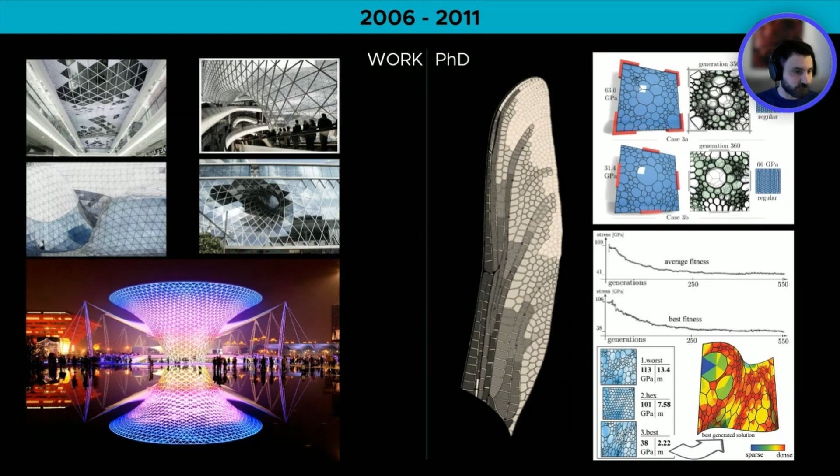And in parallel with this programming that is happening for my PhD, I'm working for Knippers Helbig structural engineering office in Stuttgart on this kind of projects that you see on the picture. So it's free-form grid structures where you have to do a lot of programming because every single element there is unique. There are lots of production problems, static optimization problems, and that's how I got first into Rhino scripting and then later into more complex programming.

So one of the first projects while I was still working in the Knippers Helbig office where the programming was heavily needed was this airport that we did with Fuksas. We won the competition with him then. This is pre-Grasshopper, 2007. This is still Rhino script. And I basically wrote a script that generated this entire facade and the structure in between automatically.

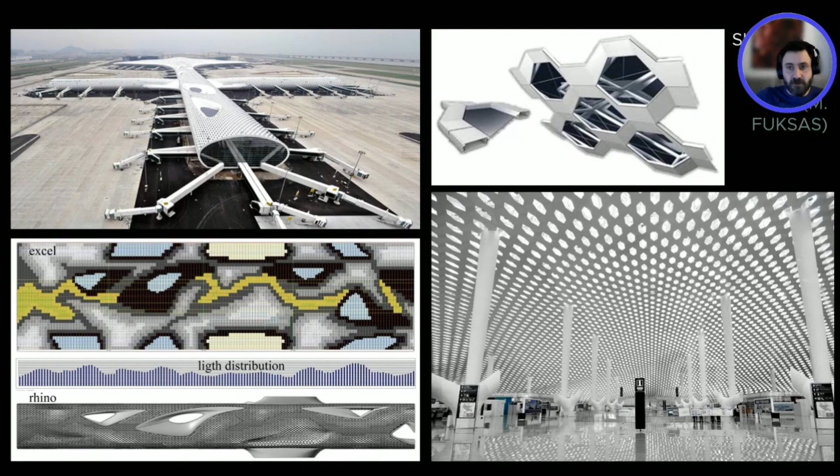What you see here is not a rendering. These are real pictures from the real airport. Some of you might have been there. And because I basically single-handedly programmed this, and every week we got new surfaces from Fuksas, and every week we had to regenerate everything, I was convinced in the power of programming, the power of automation. I thought if a single person can handle the largest freeform structure in the world, regenerating facade, regenerating structure, this has to be the future.

So this made me start my own company in 2011, right after I finished my PhD. And I decided, okay, I'm going to try to bring automation into these three areas, these three phases of the project, if you want. It's design, engineering, and fabrication, eventually assembly. And the goal was from the beginning to try to automate each one of these separate phases, but then introduce the integration, because that is kind of what we all are striving for, right? We all talk about how our industry is siloed, everybody is creating their own models, and then the communication between the models does not work, and so on. Well, if you use automation from the very beginning, then you can actually do that.

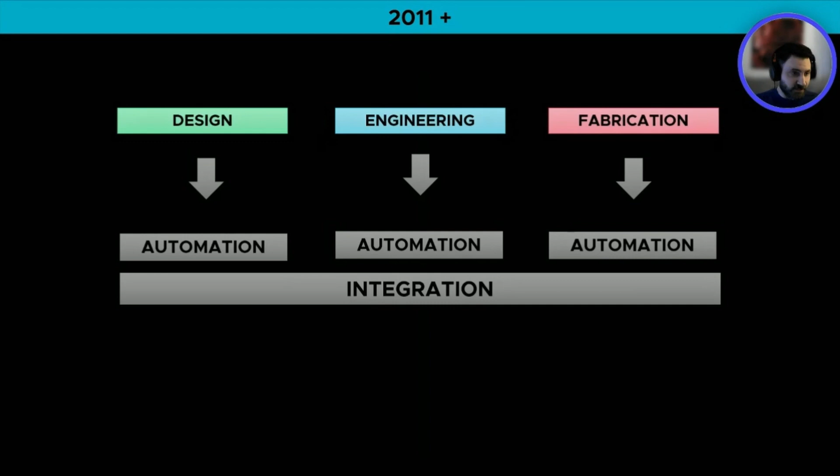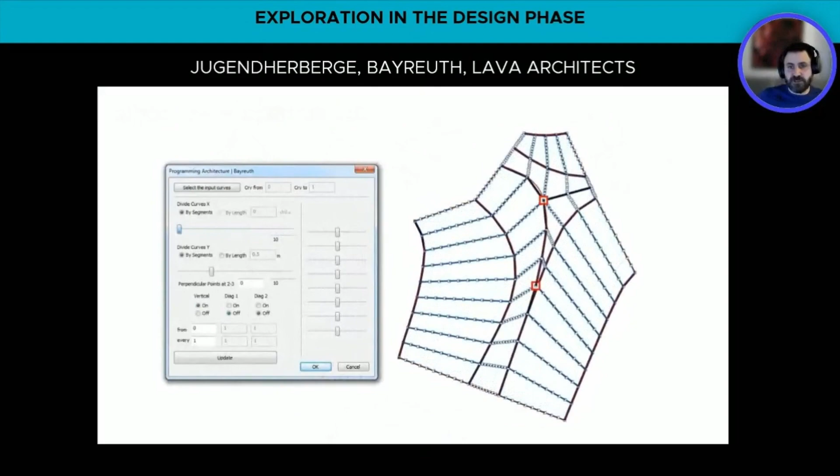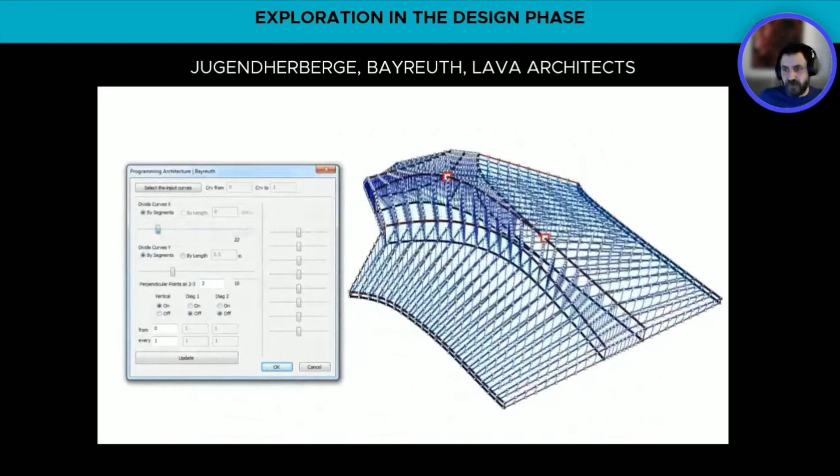From very early days, I tried to enter the design phase, and this shows one of the very early projects where I created a small plugin for Rhino, where we used the sliders to try out different structural solutions very fast. And what you don't see here is that all of these solutions that are tried out were then exported to a static analysis program at the click of a button, so that we could test and try different solutions.

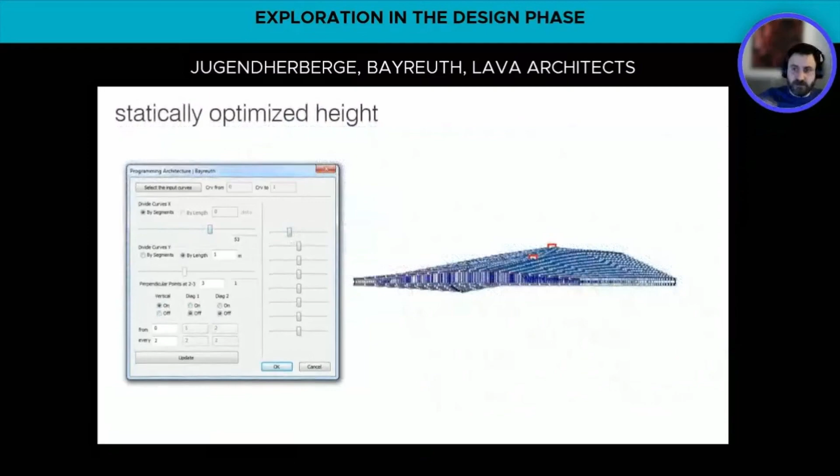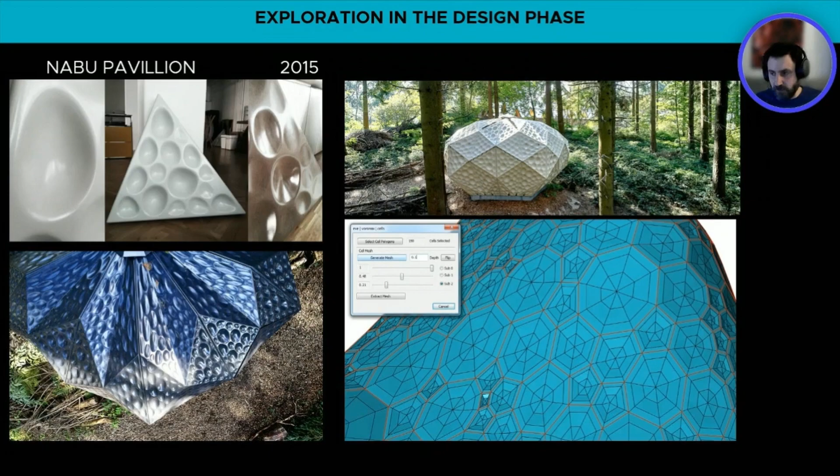I did find myself working almost entirely outside of the design phase. So most of the automation I did came after the design was already done. And I'm trying to get back to the design, but maybe I'll address that at the end of this lecture. So what happens after the design is done?

So after the design is done, after the architects are done, they usually develop the building until a certain level of detail, right? Let's say 100, 200, and so on. They don't go very much, depending on the architectural office, but that's approximately it. And then someone, usually a general contractor, takes over the model and then has to develop everything until the last detail, prepare it for fabrication, assemble it, build it, and so on. And so that's where I came in, these kind of phases where everything has to be generated. And I worked on many, many buildings, but I will show you a couple of examples.

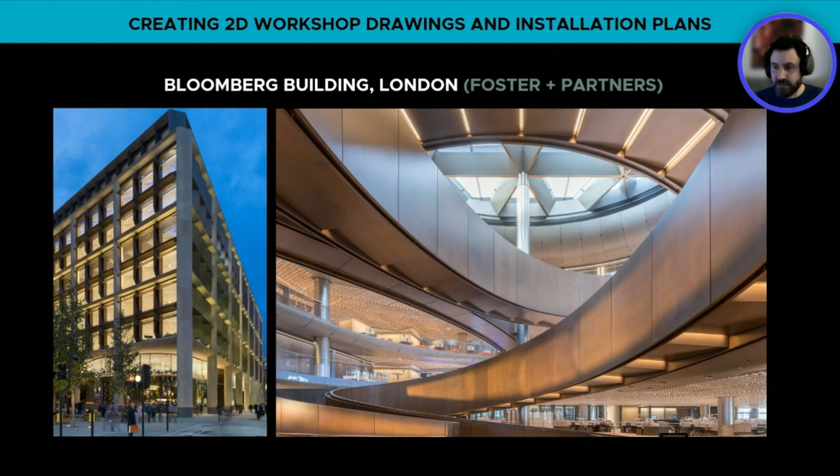This is an example of the Bloomberg building in London, Foster and Partners. I worked with Seele, who made a lot of steel elements that are behind, that you cannot see, especially here where the spiral stairs are. And the interesting part there is that you basically had to generate all this kind of 3D steel structure, but the input here was a single curve. So the input was a single curve, and then a PDF file with a lot of explanations and details and so on. But basically, all of this that you see on the screen was generated automatically, literally at the click of a button, where the single curve was an input, right?

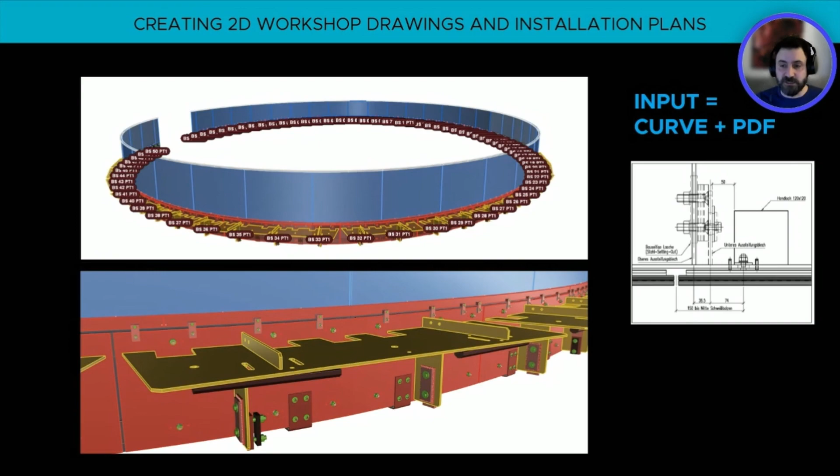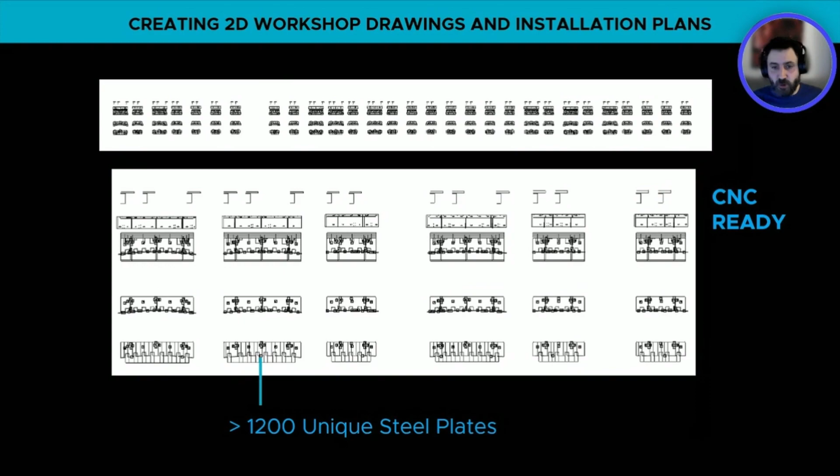And then afterwards, when we generated the 3D, we had to generate 2D as well. This is, I'm talking 2013 or 14 or something like that. And this was all done in Rhino. So at the click of the second button, let's say, the 2D was generated. And then all these outlines were automatically ready for production, right, for the CNC file. But then, because we didn't know who will produce what kind of CNC files they need, we had to also generate these kind of old-fashioned shop drawings, right, with all these dimensions and so on, so that someone can manually read it and produce it.

And then I showed this slide where it says that no human drew a single line here, just to emphasize the level of automation you can achieve. So we generated at the end, let's say, 1,200 or something like that drawings like this, where literally none of the lines were drawn by a human. It's all automated. The human just checked at the end if the layout is okay, or spent maybe 2-3 minutes per drawing to see if some dimensions overlap or something like that.

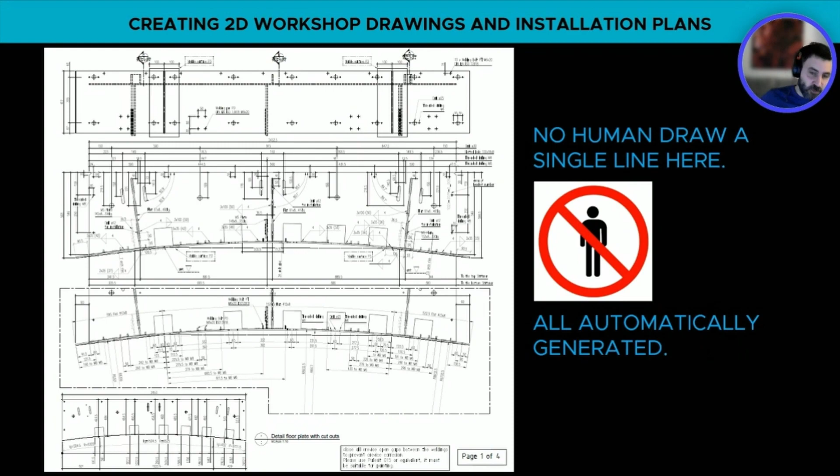And the point was that we didn't like doing this, because the point of automation is to generate CNC files, as you will see a bit later, that go straight to the machine. But even on this way there, you can automate a lot of stuff as a middle solution.

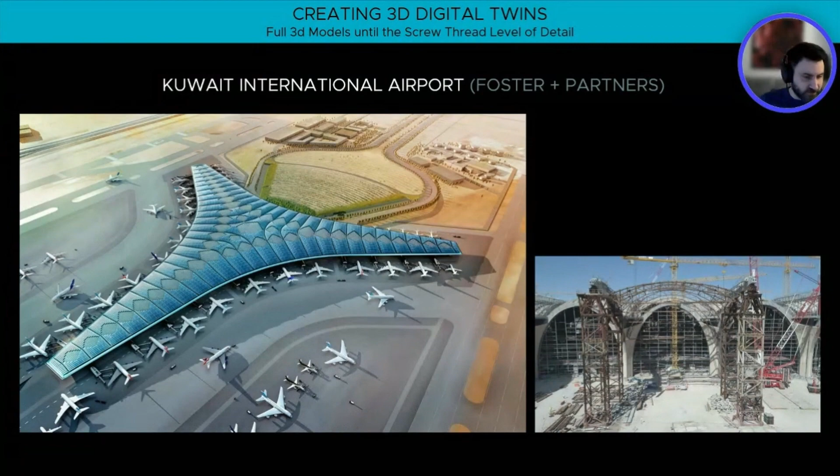This is the Kuwait International Airport that we worked on with Sobek. It's Foster and Partners, but we worked with Werner Sobek, who did structural engineering. And I can't show you a lot of details because the project is still in construction. But why I show this slide is because when people think about parametric design, programming, and architecture, and so on, they mostly imagine some kind of a steel structure, wooden facade. They don't think about all the things you can do with programming.

And this slide shows the scale of this airport. It's 1.2 kilometers from left to right there. And it had, I forgot now, like 40, 50,000 concrete panels, each one 3 by 3 meters. And what we did here is we generated reinforcement.

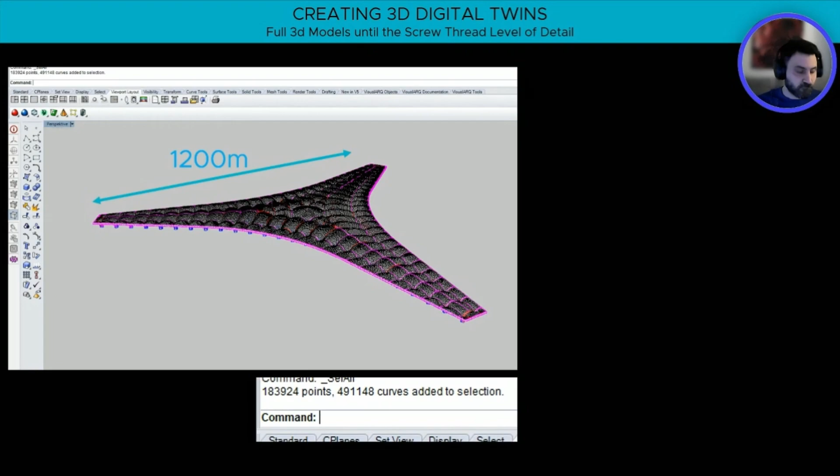So for all these concrete panels throughout the entire airport, all 40, 50,000 of them, we automatically generated reinforcement plans that we used to create them. So anything in the building is geometry, and geometry can be generated automatically. So you shouldn't limit your thinking when it comes to parametric design to some grid structures and so on. But as you can see, reinforcement is also a possibility, even for normal projects, as you will see.

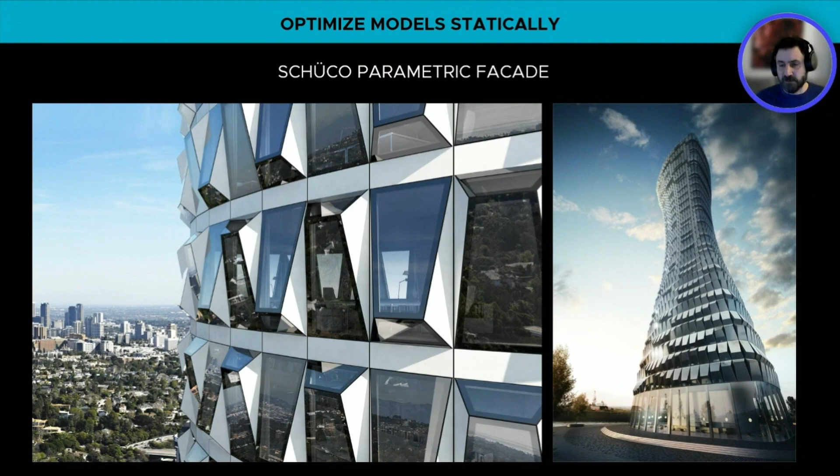And if you want, create all unique facade elements, but Schüco will basically produce it for you for the price as if they were all the same. So that was the idea, and there were many different types. This is just one, there were 14 different types with one single point on the outside, 4 points, and so on, triangular ones and so on.

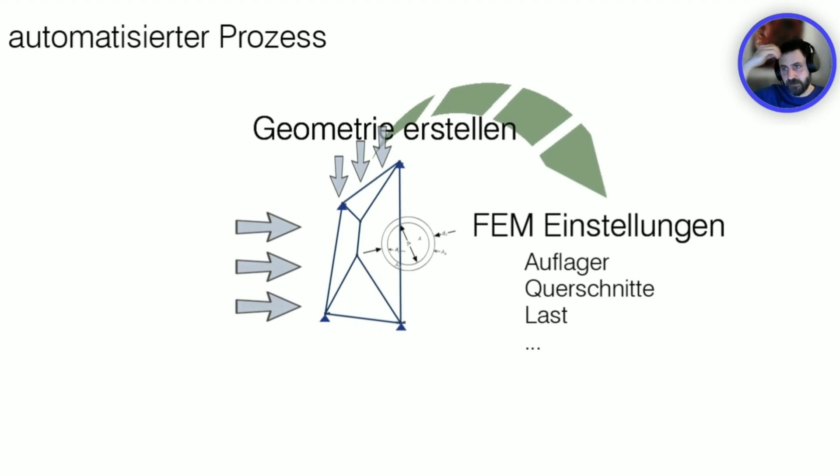But the question then became, how do you do static analysis with it, right? Like, how do you know what's the worst case solution? What's the best case solution? How do you dimension this if you actually let people and architects play with that? So there we connected again Rhino with the static analysis software. We did this first with Oasys GSA, later with Dlubal, with RFEM and RSTAB.

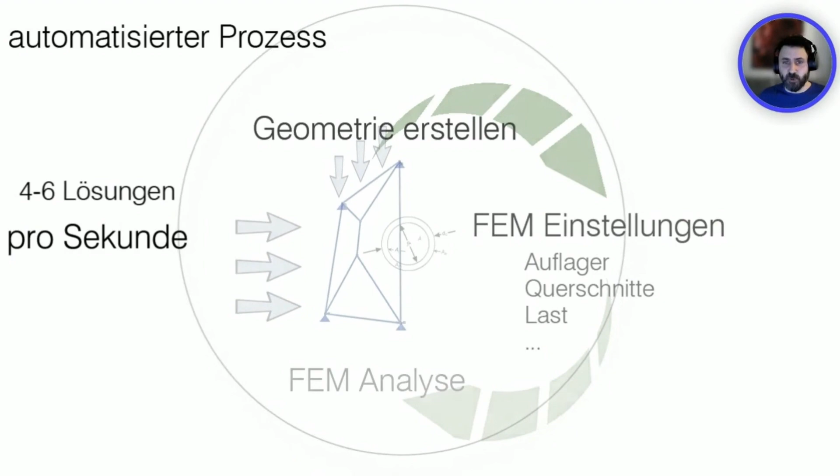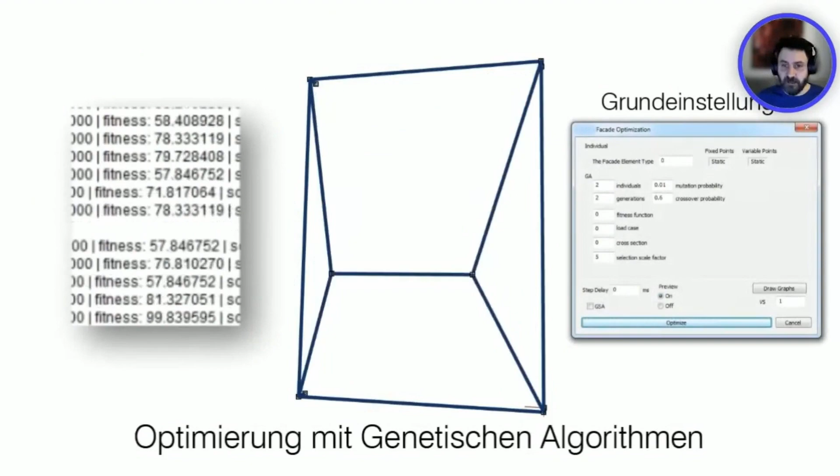And as you can see here, we generated 4 or 6 solutions per second. That means that the geometries were generated, they were prepared for static analysis, and then statically analyzed, and then evaluated, and so on. And so we could then determine for each type of facade element what is the best case, what is the worst case, and maybe use some dimensioning, right? Know how to dimension the profile so that it works for any case that the architect can come up with. That was one type of the problem.

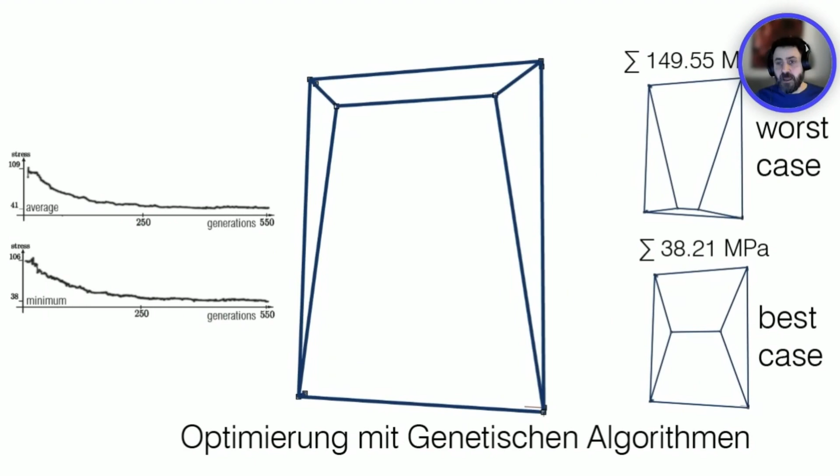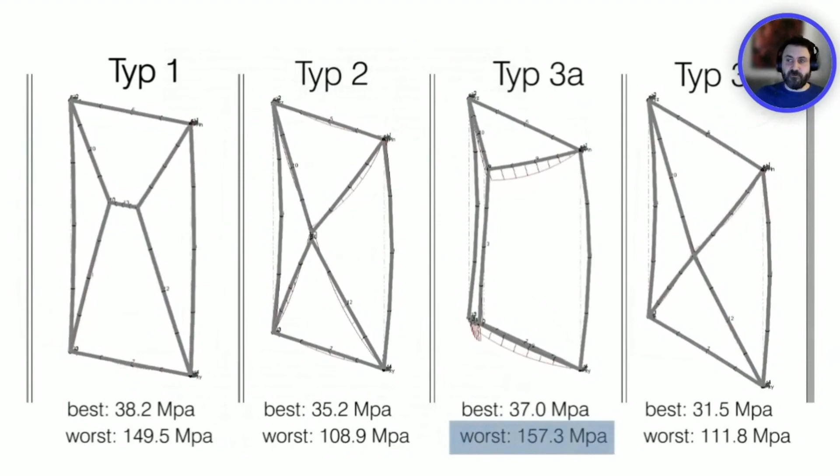And then we went further. We solved different problems, but one that is interesting is that once you do the dimensioning, once you take a certain profile, let's say you know that the 80 millimeter profile will cover all the solutions, then the question is, what if I take the profiles of 60 millimeters? What solutions can I cover with 60 millimeters, right? So then what we did is, I think I'll show you in just a second.

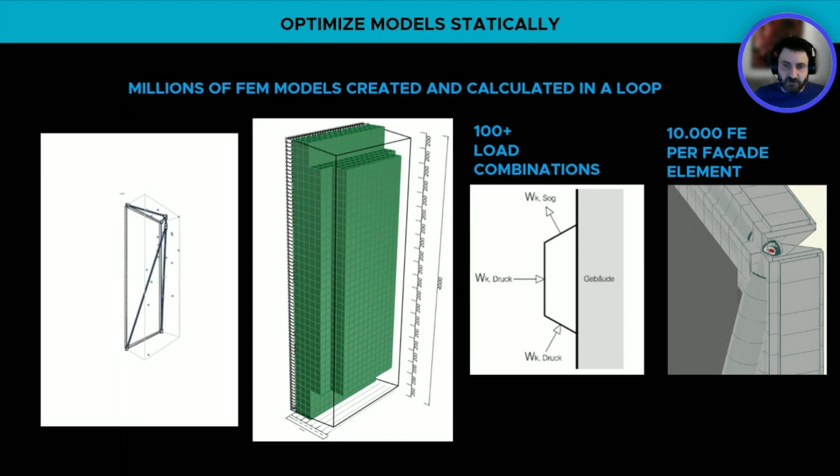Yeah. Then we could analyze, and then we could say, okay, for a 60 millimeter profile, you get this green cloud, right? So you as an architect, if you want a bit cheaper, a bit lighter facade element, you can move within this green cloud. If you want a 50 millimeter, then this cloud is going to be even smaller. So we basically created a catalog of different solutions. So that's one of the examples of what you can do if you connect different software and then do geometrical and statical optimization.

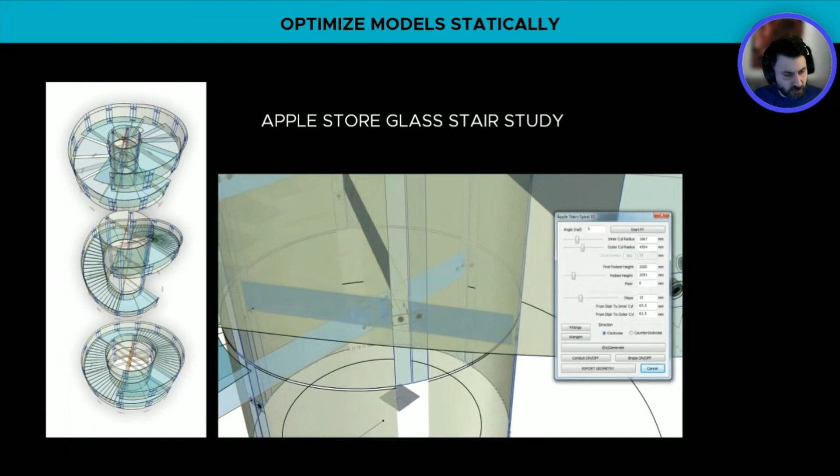A similar thing you can see here in the Apple Store glass stair study, also with Engelsmann Peters and Seele, also a long time ago, let's say 5-6 years ago, maybe 7, where Seele is engineering these Apple Store glass stairs. And the question there was also the creation of different models, right? So you have a model, you have new stairs that come, always slightly different. They're not really the same.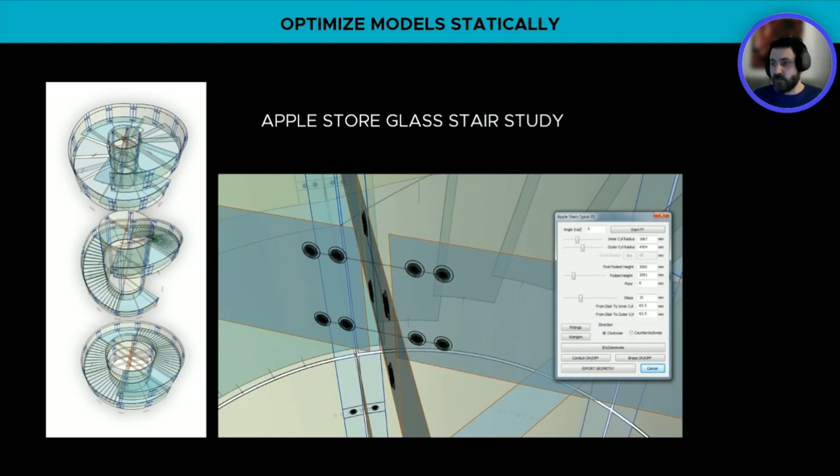And then the structural engineer has to create their own model from scratch. They told us usually it takes them 8 weeks or something like that. And then you have to create a model for production and so on. So we said, okay, why don't we combine all of that into one single model? And so with a small plugin, we could move the sliders around and create these geometries.

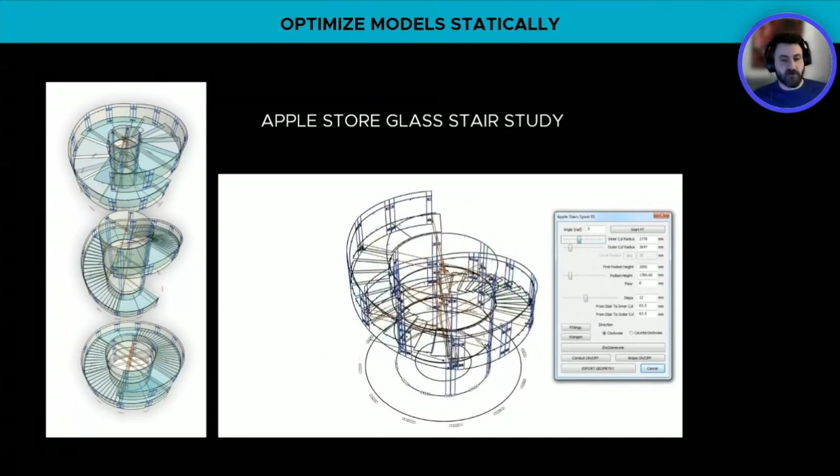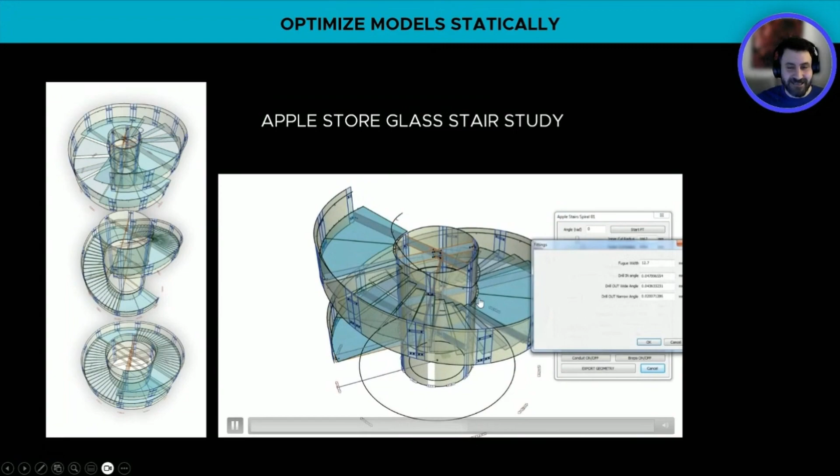And once we're done, with a click on a single button, we could export that to the structural analysis program, and also prepare everything for production. So that was also one of the early examples of this integration, right? Connecting different elements. A similar task with the Chadstone Mall in Melbourne, this was, I think, also with Engelsmann Peters then, with Seele.

When we got to work on this, the engineers had to do a glass static analysis for all these elements. And they told me usually they estimate which is the best case, which is the worst case glass panel. They do a detailed static analysis on it, and then they extrapolate over all of them. We're talking about 3,000 plus unique glass panels, right?

And then I said, okay, why don't we use our tools? Why don't we create a plugin that will do a detailed static analysis in a loop for all 3,000 panels? So that's what we did, and we actually analyzed all of them, and of course we realized that the human estimation of which one is the worst case, which one is the best case was not right. We found different ones that were worst and best case.

And in this particular project, all the glass panels, I think, were still done with the same thickness, but you can imagine that you can start then optimizing the thickness of the glass panel, the type of the glass panel, and so on.

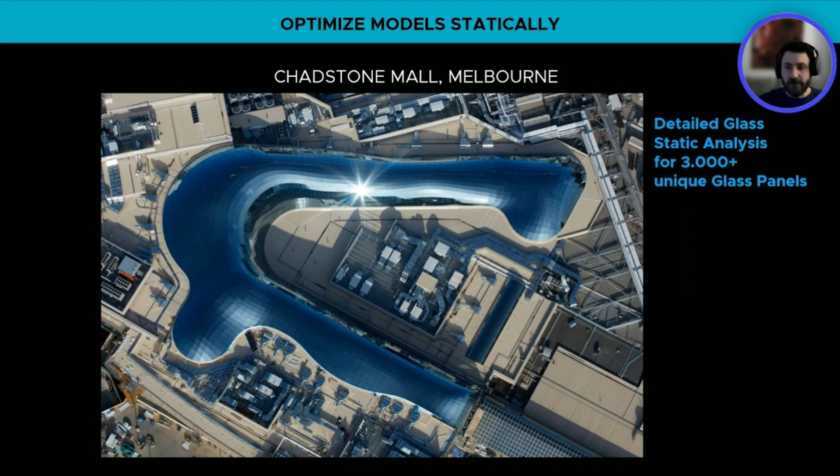What we did recently on this Madison Square Garden Sphere in Las Vegas is something I cannot go into too many details about. I will try to explain what we did in a less public setting. I could show maybe some of the tools that we developed, but I hope I'll get the point across. It's a $2.8 billion project, and the interesting part you have to keep in mind is that there's a small group of people working on it, the Seele, the engineering, and we did the automation of the structure.

And you hear some sound, right? This is from the U2 concert, which was happening inside the Sphere at the opening.

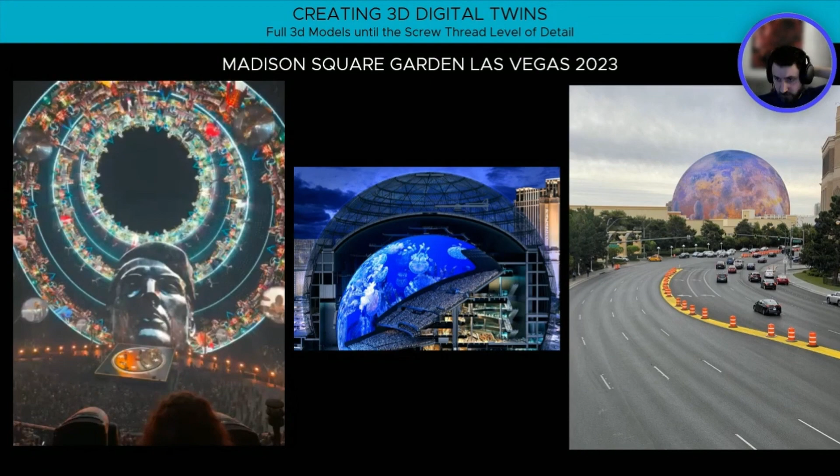And our task was, we were mostly concerned with this inner shell, because the outer shell was relatively simple. As you can see, it's just a simple grid structure. It's just literally a shell. But the inner one was pretty complex, and it had multiple layers, right?

So we're talking about approximately a diameter of 120 meters, and we are talking about the primary steel structure that underneath holds a secondary aluminum structure that holds the tertiary aluminum structure, and then the tertiary holds the LED screens. And the LED screens cannot have a gap between them. So anything that's above 0.1 millimeters can be perceived by the audience as a black line.

And the screens themselves were very small. They were like half a meter by 30 centimeters. They were like, I don't know, 15,000 screens connected together. So they had to work in a very precise setting. They had to work there in the exact temperature of 23 degrees, I think, because of the temperature dilatation. But that shows you how precise the engineering had to be. So it had to be automated.

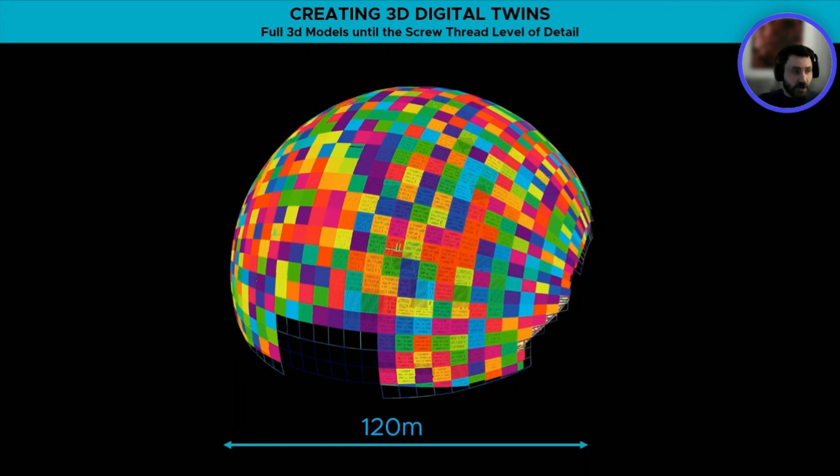And although we are talking about a sphere, a fairly regular shape, there were a lot of things like the position of speakers and so on that made the geometry highly irregular. So what you see here is these 885 so-called facets, and each one of them is like 5 by 5 meters approximately, and almost all of them are different. We had some symmetry left and right, but if you look at one half of the sphere, all of them are different on that half.

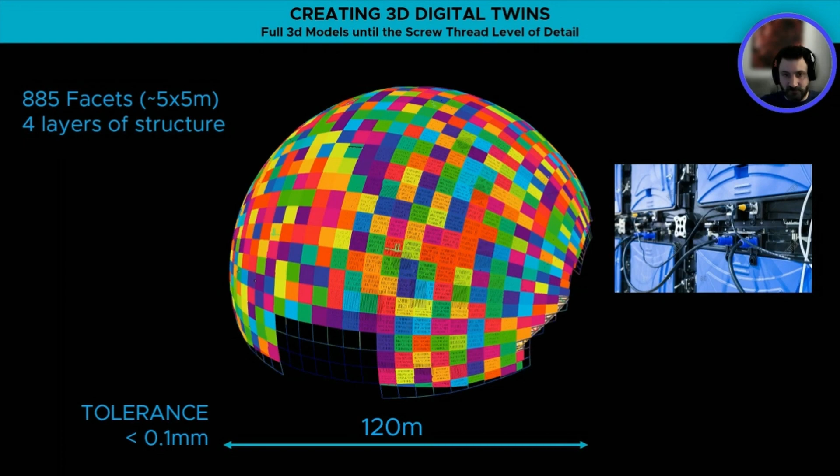And when we generated everything, because everything was automated, we didn't care. We treated every facet as if it was different. Because once you are automating stuff, at some point you don't care if all the elements are the same or if all the elements are different. You're just doing the same thing. The algorithm is doing its thing. You're just creating modules in algorithms, but you don't care about geometry.

So basically, we treated everything as different, and you have to remember, without me showing any details now, that this was a machine, basically. This is a big TV, right? So it was full of cables and holes, and it's a very complicated structure, and Seele did marvelous engineering there.

But the question was, so what did we generate? We generated these layers of structure, right? And the layers of structure are made out of structural members like steel, aluminum, and so on. So what we ended up with is 30,000 or so unique aluminum profiles. And we're talking about aluminum profiles that are like 5-6 meters long.

And because of these cables and connections, each profile had more than 100 works. By work, I mean the machine work, like either a drill or a thread or a pocket or something like that. So every profile was a Swiss cheese in itself, and it had to be connected with all the other profiles in the scheme.

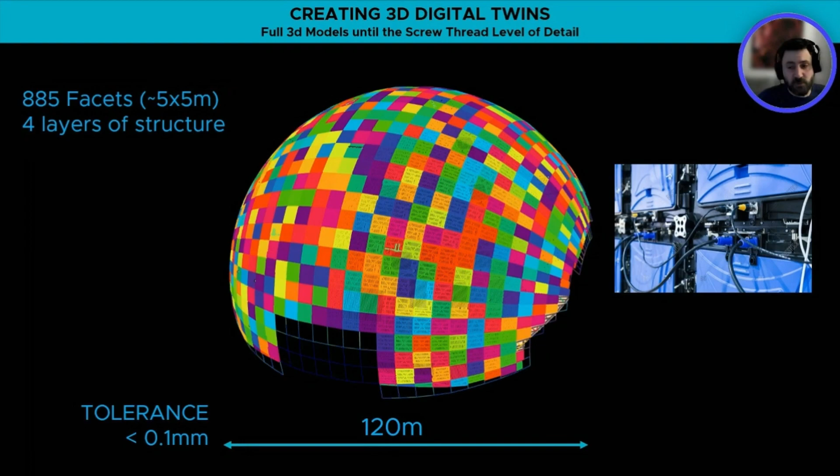And we started with very, very basic rectangles. You see on the bottom here these very, very basic rectangles of these facets. That's what we started with. That's what we took as an input, and then we tried to generate everything else automatically as an output. So we generated 3D profiles, like the ones you see here, for example.

And once we generated them, then the question of production came, right? So how do we produce them? Well, we exported them all automatically into some 3D files, into some STEP files, right? We exported 30,000 STEP files, and they go into the machine, right?

Easy. Not really easy, because there is a software that translates STEP files into machine files, right? G-code. And if you have complex profiles with like 100 or so works, that doesn't always work, and you have to manually adjust it and so on. And with such a huge number, that can be a bit problematic. So again, programming came to the rescue.

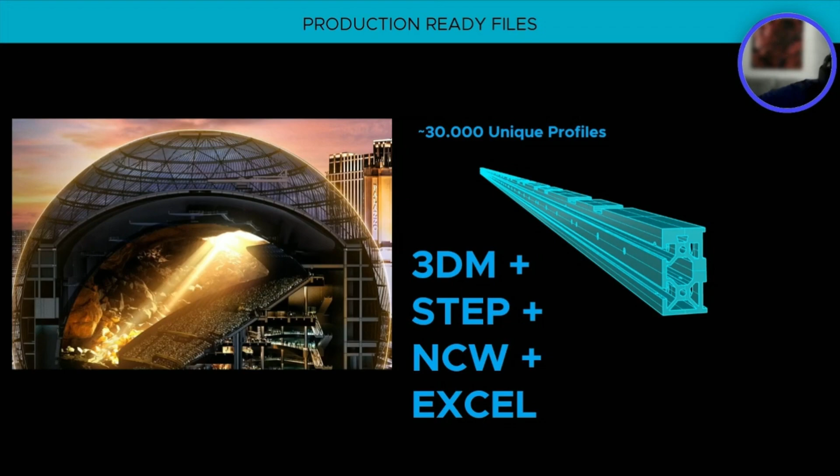We first agreed on which machines will be used to produce this. These are aluminum machines that use this NCW standard, which is a G-code standard for aluminum profile machines. So what we did is we created an NCW exporter directly in Rhino, from scratch. So once we generated these 30,000 STEP files, we then automatically also generated 30,000 NCW files, right?

And if you open an NCW file, this is what you see here on the left. It's a normal G-code file, nothing special there, but it was created uniquely for every profile, right? So for every single work there, drill, notch, mill, pocket, everything was there. So that once you get to the machine, you shouldn't have any problems, right?

Of course, you cannot avoid some errors happening along the way. And all the errors we did find were at the profiles where someone had to manually intervene. Everything that was fully automated, no problem there. Wherever a human had to maybe move some drill by 5 or 10 millimeters, that's where the errors happen. So we realized that automation is saving a lot of work, especially because around 30 or 40% of the code is error checking, right?

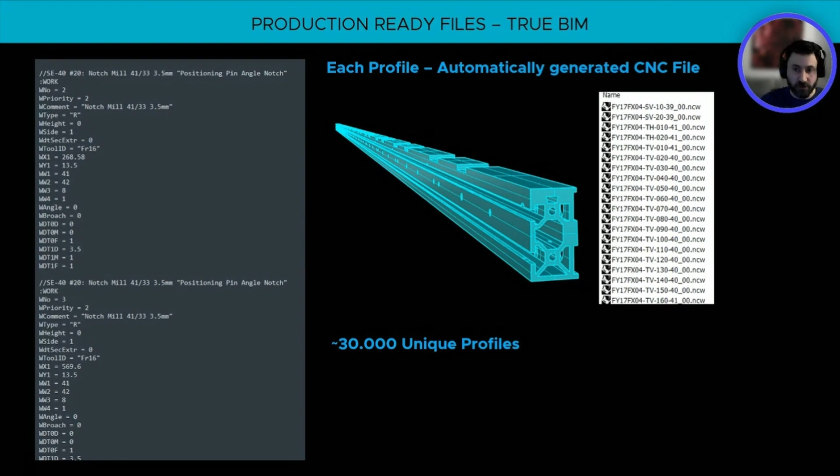So we had routines or algorithms that overlapped the NCW file and STEP file and tried to see if they fit together, if there are errors, and so on. So we had a lot of error checking code that automates the human work in that area as well, which is pretty cool. And again, with this structural niche of ours, I can just show you an overview of how we do it in general.

We created this complete structural model for structural analysis, and we had at the end close to or even more than 200,000 structural members. So you can forget about doing anything manually there. And how do we do that? Well, we create this geometry in Rhino, and the whole project, from these small rectangles on the top left until the CNC machine and the produced element, everything was done in Rhino, right?

No Revit, no ArchiCAD, no Tekla, just Rhino and Excel from time to time, because all the elements in our models have all the attributes they need. Every single screw, every single assembly has the color, coating, mass, whatever. There are 55 properties. And so you can extract everything you need at the click of a button, like all the part lists, all the bills of quantities. You don't have to do any of those manually.

Just click a button and you have the exact number of screws per facet, per hemisphere, whatever you need. You have the weights of all screws, of all members, and so on. But when it comes to structural analysis, as you know from experience, the engineers usually do their own model. But in our case, we didn't have to do that.

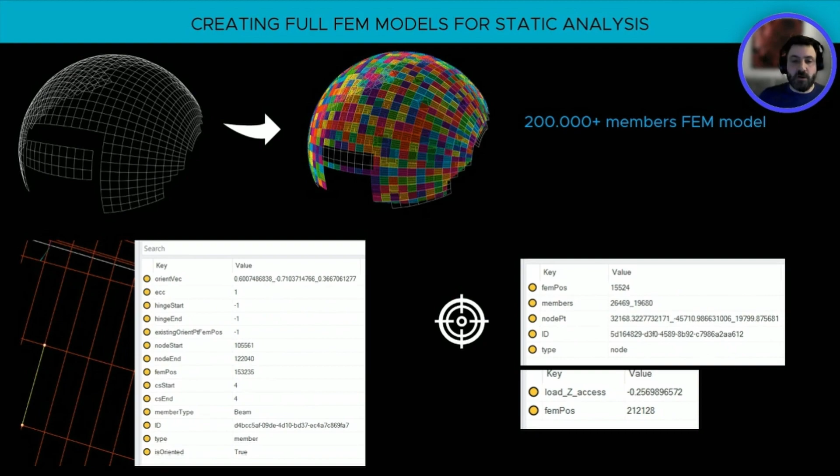So we were able then at the click of a button to export that to a static analysis software, in this case RFEM and RSTAB, using code. This is just a small snippet so that you see how that looked like. You set the loads, load combination, hinges, cross-section, support, and then you don't export DWG or DXF, and then they have to import it and set stuff manually.

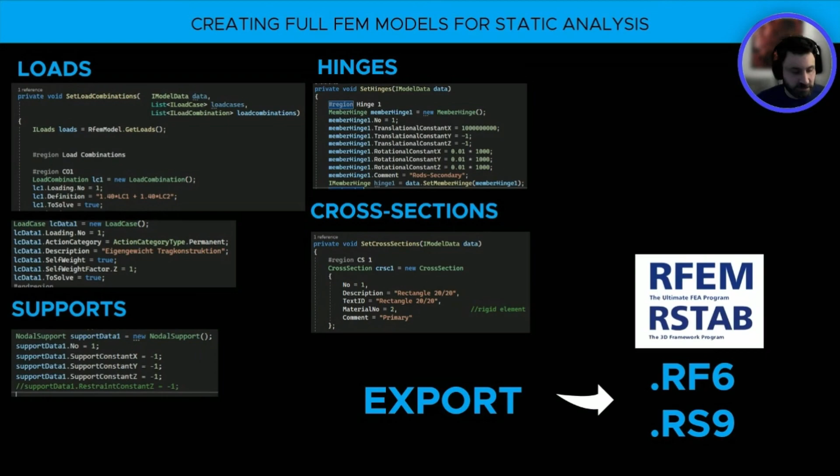No, we export the actual RF6 or RS9 or whatever file, and when they open it in their RFEM, everything is there, everything. They just have to click on analyze, right? All the loads, combinations, support, literally, they don't have to do anything. So that's the idea of completely integrating everything and creating these models from scratch.

And a lot of people think they cannot do this because, first of all, the model will be too heavy, or who has time to model all this and so on. And that's exactly the point of automation, right? If you automate everything, you start with this simple wireframe, then you can generate what you need when you need it, right? I don't hold all the screws all the time in the entire model.

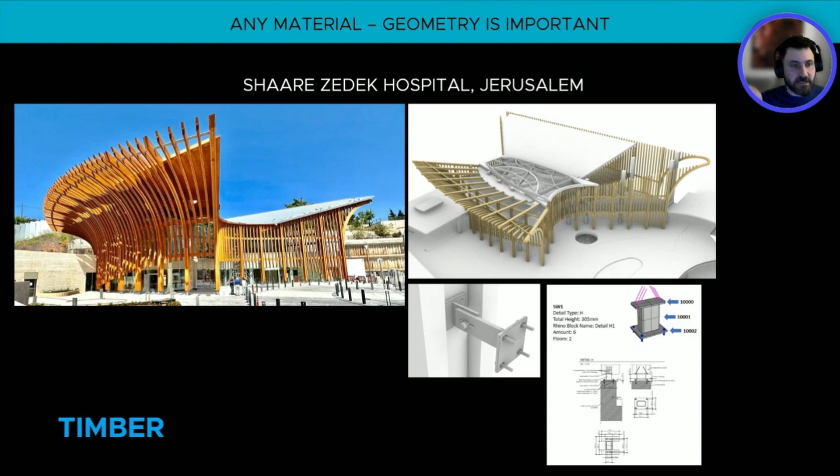I hold just the position of the screws, and for all the beams, I hold just the position of the beams or the axis of the beams, and then I generate what I need, when I'm ready to export the model, when I'm ready to count all the screws or the weights of the beams and so on. Then at the click of a button, I can extract what I need. And then I can do some things that are not usual.

This is the outer facade that you see, made out of wood, but the entire interior as well was made out of wood. The Farrow architects did that from Canada, and they're very famous for these types of buildings. They have lots of these wooden buildings.

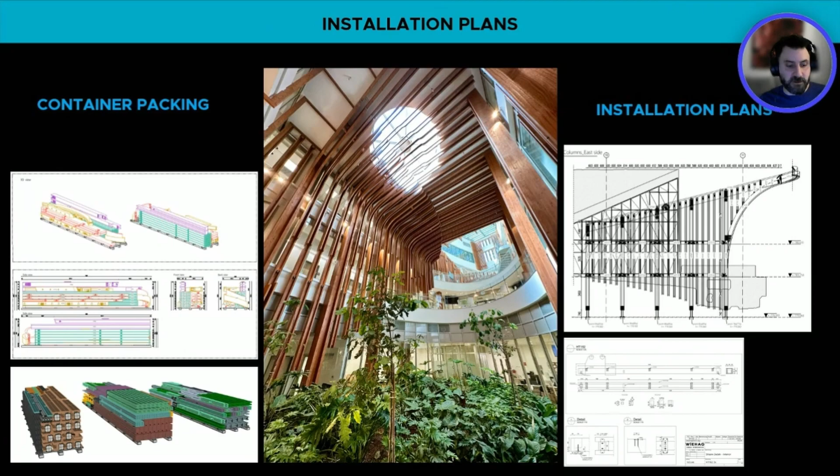Automation can always help with the geometry generation. And here you can see a couple of interesting pictures from the construction. You see what kind of cool elements we had, like this curved one at the corner, which is basically a 3D sculpture made in timber. And on the right, you can see also a small snippet of how the model actually looks.

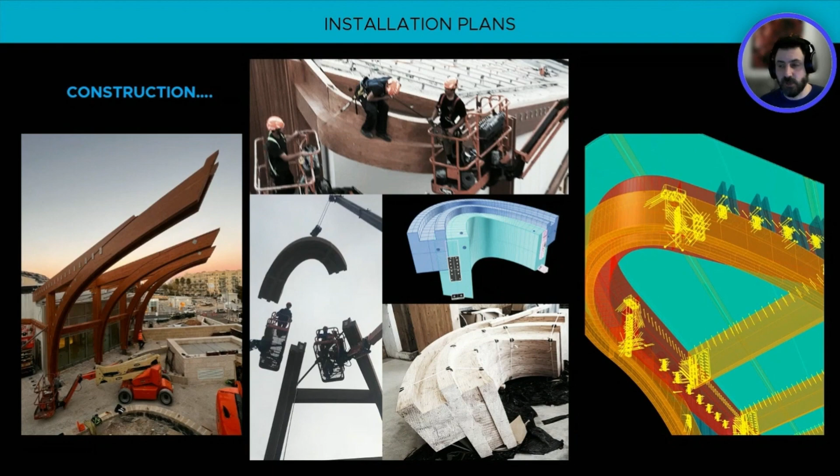So every nail, every screw is there. And once we go into the production, that helps us to track and design everything. And right now I'm doing a research project with Strabag that deals with concrete printing. And that's again another case of the variety you can achieve using programming.

Here we are creating some kind of a plugin that basically can import Revit walls or Revit slabs or whatever. We're concentrated on walls at the moment. And this Revit wall geometry is connected directly to Rhino. In Rhino, we have algorithms that create a path.

We have different kinds of parameters, the sliders that we can move left and right to optimize that path. And using that path, we extract the G-code, and the G-code directly goes to the robot arm, and the robot arm can print walls on the site.

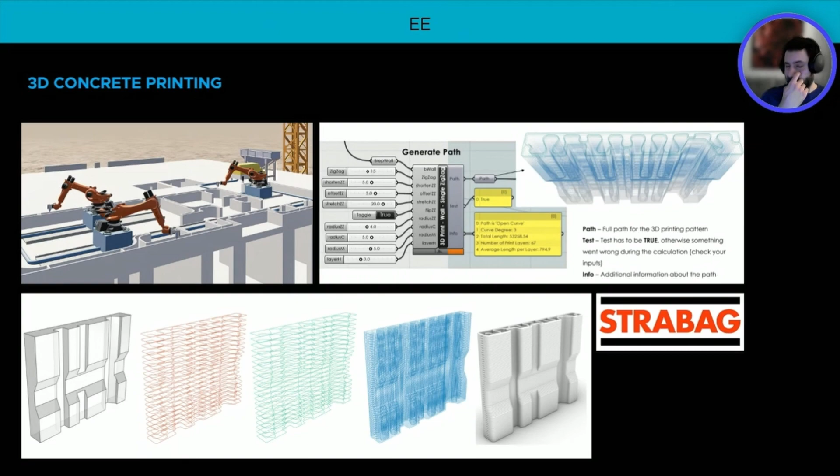This is a research project, but of course, Strabag is a very big company, so they're already doing some testing, and it's pretty cool, but there's not much I can show from my side yet. The people on the Strabag side are doing most of the physical experiments. I'm doing the code.

And there's a lot that I don't show here that you can do with code, especially in the design phase, and that I did in the early days, like analyzing the sun, analyzing the shadows. These are some screenshots that we did not for architects, but for an electrical engineer who created a solar panel farm where the solar panels were rotating. So we did different kinds of shadow analysis where I could extract the volume of the shadow, look if it intersects something and so on.

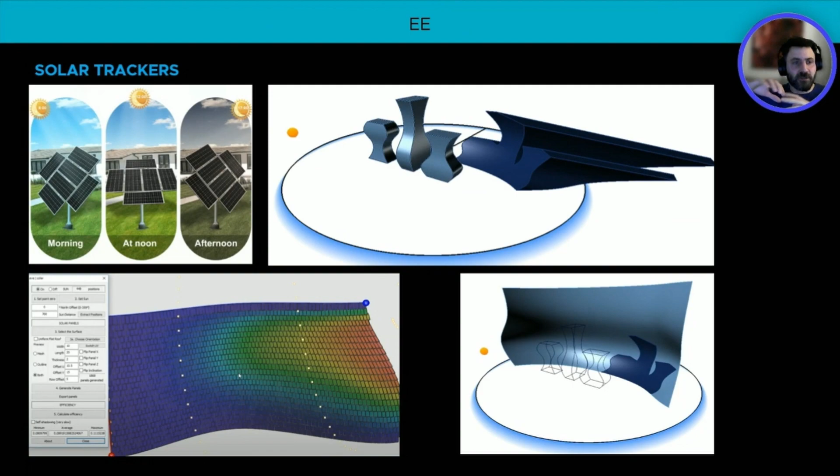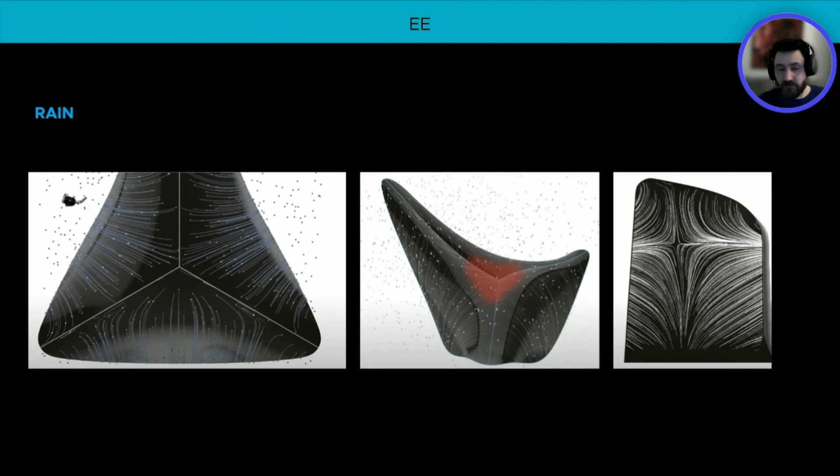Not gonna go into detail about that, but for some early projects, I created a rain plugin for Rhino where I could actually visually look at the raindrops fall and visualize the path of the water and so on. And so these are all little tools that you can do using automation. And in my practice, I try to spread this as much as I can because I believe in this integration.

If someone is interested in the technical aspects, I started programming in C++ in the first 5 years. Then I moved to C# because it was much easier, especially to connect with other software, because software like Revit, Tekla, RFEM and so on give you a C# API, so you can connect them in one routine. However, I really like to experiment with other types of software.

I love the Unreal Engine and seeing how we can connect all these to create superb visualizations. I'm experimenting with AI, and for that you have to use different kinds of software. And since everything is moving to the cloud, like all the tools for collaboration, we cannot lag behind. So I personally had to learn a lot about JavaScript, HTML, CSS, and so on, so I can see how I can contribute in that part.

I even have some videos on my YouTube where I talk about Rhino Compute and other systems that can help you create things in the browser that then use geometry calculations in the background and so on. But that's not the subject of this webinar. The subject is basically to show you an overview of what automation can do.